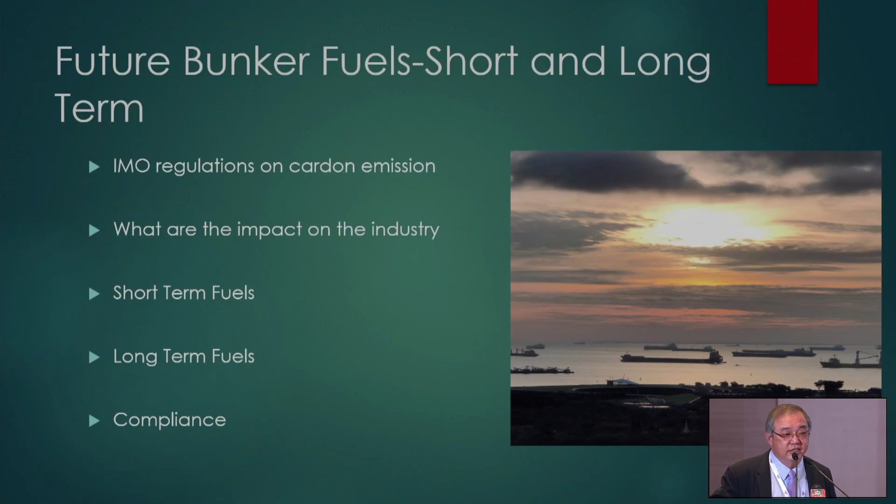Now, reduction of sulfur - on January 2020, IMO regulated all vessels cannot burn more than 0.5% sulfur. So that's when the decarbonization started. And then at that time, it was also announced that by 2030, IMO target carbon emission to be reduced by at least 50% based on 2008 emission, and by 2050, zero carbon. So that is what happened.

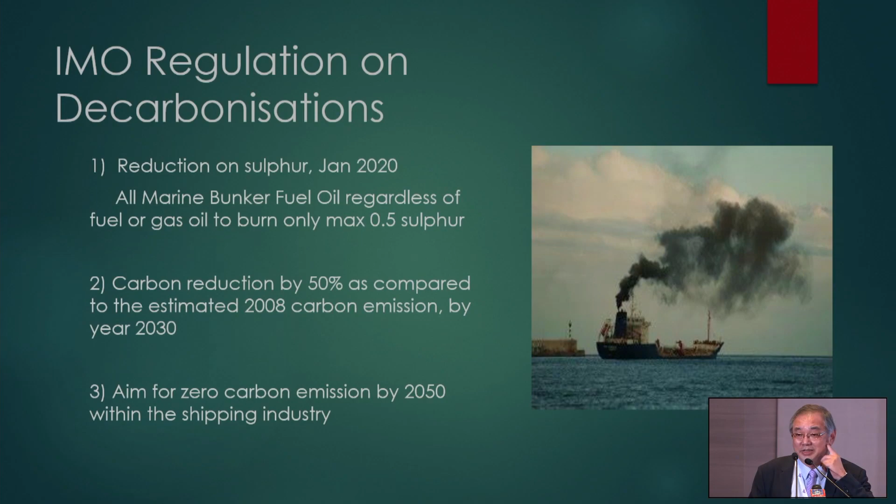So when we say zero carbon, my first thought is, what will happen to fossil fuel? Because as of today, fossil fuel cannot meet zero carbon. So what will happen? Food for thought.

When we started off the 0.5% sulfur, we had an initial part - there's a lot of quality issues. I remember the case of Houston, whereby engines broke down because of blending, because of some sort of chemicals involved. Why? Because the majority of crude oil at that time, till today, doesn't produce 0.5 or low sulfur. Probably only sweet crude, right?

Only sweet crude has low sulfur. So a lot of the low sulfur marine fuel is blended down to 0.5. So what's our blending component? Nobody knew. So we had a big quality issue that year, that started off from Houston and it spread all the way to Singapore.

But of course, it was very fast, it was blown over, things settled down and then things just went back to normal. Okay, until beginning of this year, Singapore had one big issue whereby Glencore blended fuel for low sulfur hit more than 200 vessels - not that 200 vessels complained of engine problems, but contaminated product was supplied to more than 200 vessels.

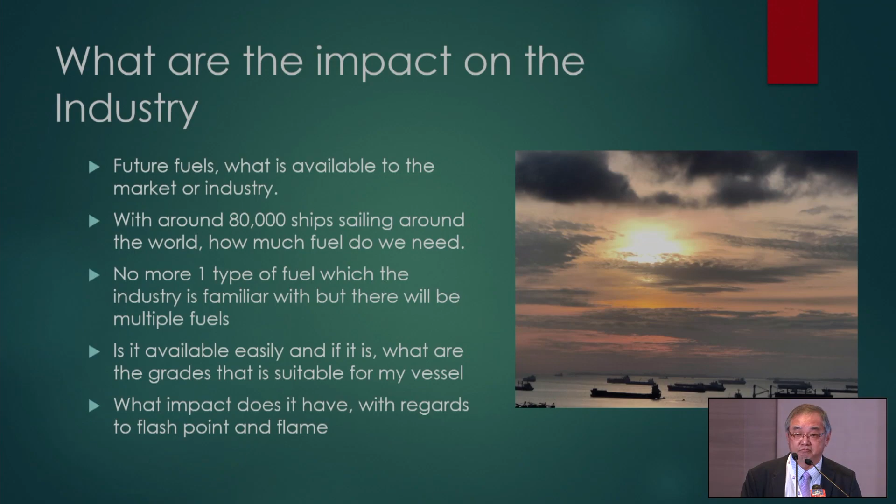So like I say, availability of all this alternative fuel or greenhouse-gas-friendly fuel is a big headache today. For the next 5 years, it's still going to be a big mess, a big headache also, because not every port will have it.

Just this year in March, I was moderating a panel in Singapore at a conference, and I was telling the audience: all major bunker hubs will go into multi-fuel supply. That means besides low sulfur fuel and low sulfur gas, they will also come in with biofuel, methanol—we call it multi-fuel.

But there again, bunker suppliers ask me, Simon, multi-fuel, how much should I allocate my bunker tanker? I've got 10 vessels. How much should I allocate? One vessel for methanol, one for biofuel, 2 vessels for very low sulfur fuel? And guess what? I tell you today, nobody has the answer to that.

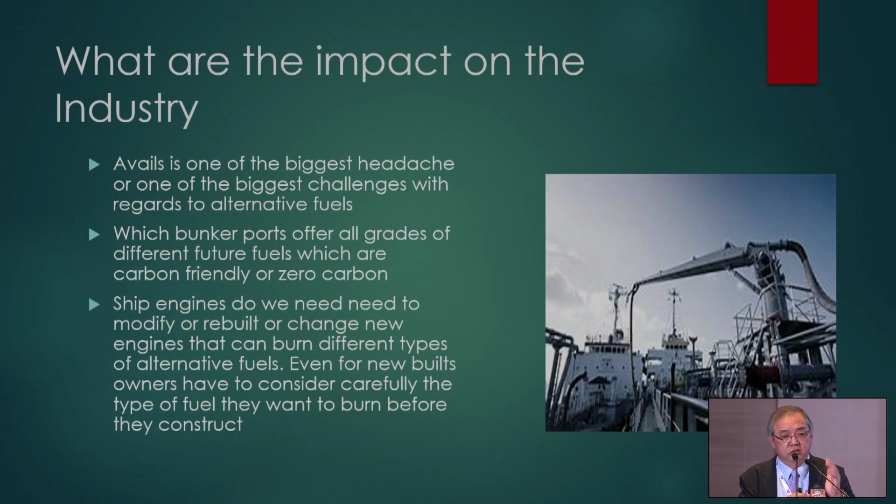These are considerations that ship owners have to consider. That's why for big fleet ship owners, it's easier, because they have a lot of vessels and are able to allocate how many to methanol, how many to each different type of alternative fuel that will be available.

When a ship has multi-fuel, what sort of things are they going to look at? Can my engineers or my crew handle this multi-fuel or not? If I'm burning LNG, does my crew know how to handle LNG? Product knowledge again - if I'm burning gas oil with methanol, does my crew know how to handle methanol? Because methanol can pose some health risks and safety concerns, right? So do they know how to do it? Some of them is just like, oh, methanol, I take it and drink it as alcohol, and the next moment they just drop dead. That's what happened in Russia, Siberia.

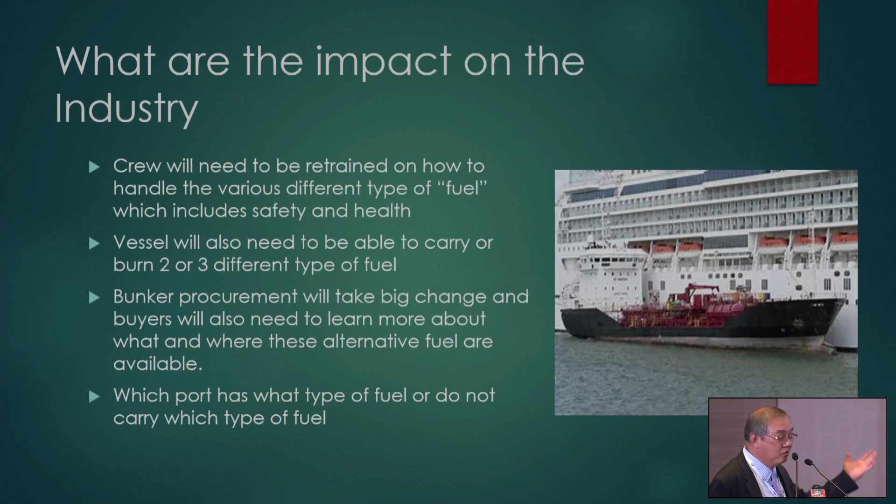So, suppliers going to new fuel, how much will it cost me? LNG today hit through the roof, 4 figures per ton. How about biofuel? Biofuel is also today close to $1,000, when fuel oil is only about $600 to $700 per ton. And how about ammonia, green hydrogen, and all that? Nobody knows the price. Again, crew on board a bunker tanker, on board a ship, do they know how to handle this type of fuel or not? Because of health and safety concerns. Cost of operation definitely will have to shoot up.

So these are impacts that we will have to face when we go towards zero carbon, zero emission. Cost of shipping will go up because bunker fuel - today, operation cost of a ship, some of them tell me it's about 30%, some tell me it's 50%. So when you have 30%, 50% of a cost that is on the fuel oil to move the ship, if all these costs start to go up, our product becomes more expensive. Don't forget, besides that, when I burn methanol, for 1 ton of gas oil, I will probably need to burn 1.5 to 2 tons of methanol. For 1 ton of gas oil, I may have to burn 2 tons of LNG to have the same propulsion. So cost is definitely a big issue, going to be a big issue.

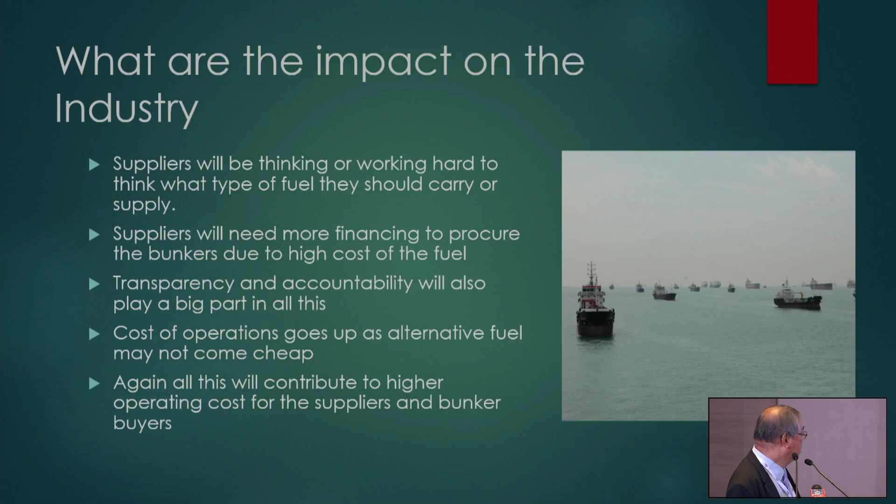Short-term fuels - today we are talking about, are we talking about 2030 short-term or 2050 short-term? 2050 is definitely a long-term fuel, because it's going to be zero emission. 2030, some says, oh, that's mid-term, not short-term. But to me, that's short-term, because 2030 is to prepare you for 2050.

Based on IMO regulation, long-term goals will be to best not use fossil fuel. That means IMO is telling us, hey, 2050, let's cut all the fossil fuels. When we say all that, is the terminal ready for it? Ship owners ready for it? Bunker suppliers ready for it? Yes, you say 2050 is still a long way, but infrastructures need to be built early and not wait until 2040 to start building all this infrastructure. I tell you, it's going to be too late.

So short-term fuel may not meet zero carbon, whilst long-term fuel are those that can meet zero emission. Short-term, we talk about biofuel, LNG, methanol, etc. Does this mean fossil fuel will cease during the short term? No. My personal prediction is fossil fuel will still last up to 2040, that's when all the new ships come in, ready to burn zero emission product. So that's why by 2050, fossil fuel for bunkering, I think, is gone.

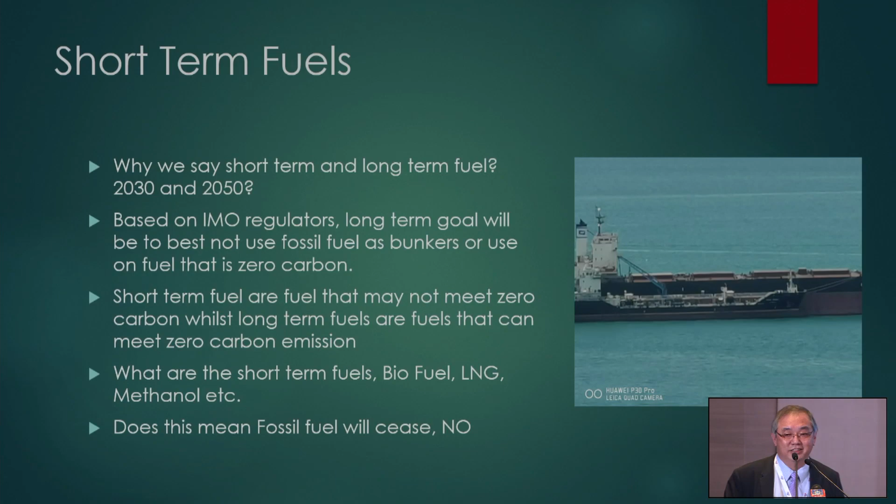Presently, biofuel is catching on - Rotterdam, Singapore, Indonesia, Malaysia. I'm not too sure about Fujairah, but it is catching on. Malaysia, they are burning B10 for gas oil. Indonesia, their own internal fleet sailing within their islands is burning up to B50, B70. Singapore, we allow up to B25. So the volume is catching up, is growing.

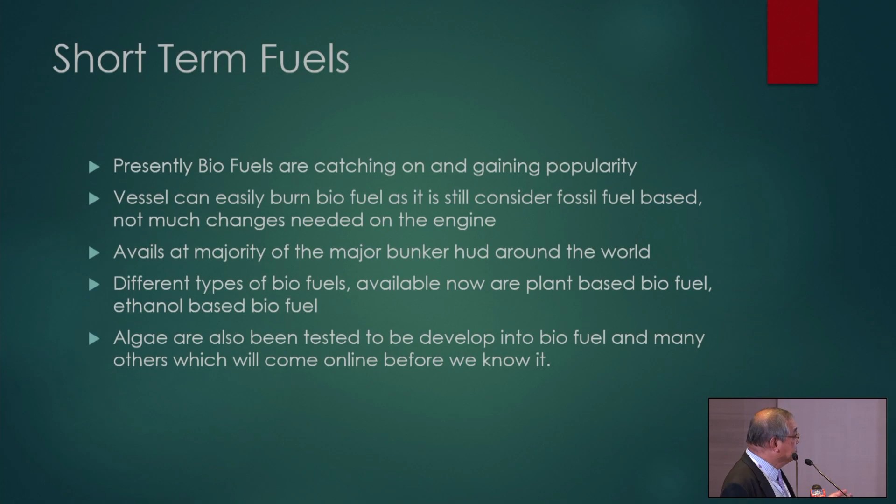So for biofuel, for ship owners, to buy biofuel is much, much easier, to procure biofuel is so much easier. Algae are also being tested to develop into biofuel, and frankly there's many others that have been tested. Ethanol is one of them, sugar, plant-based biofuel, right?

LNG, why do we say it's short-term? Because LNG actually derives from fossil fuel also. Concern is the methane slip, because methane is a gas, invisible gas that burns the ozone area - it burns a big hole in the ozone area on the Earth. So for LNG, we are very concerned about methane slip. But of course, there is the other LNG, which is green LNG - that can be a long-term solution.

Right? Very low sulfur fuel oil is considered short-term. Like I said, even up to 2030, fossil fuel will still be around, but the usage will probably be lesser.

Methanol, conventional methanol, can be considered short-term, and it can also be looked at as long-term. Why? Methanol is petrochemical based.

One good thing about methanol is when there's a spillage, unlike fossil fuel where I've got to fence up the whole ship and the area around the sea, for methanol, when you have a spillage that goes into the sea, it disappears. It doesn't kill, it doesn't harm the environment, the ocean environment, the sea environment. So it is very clean, right?

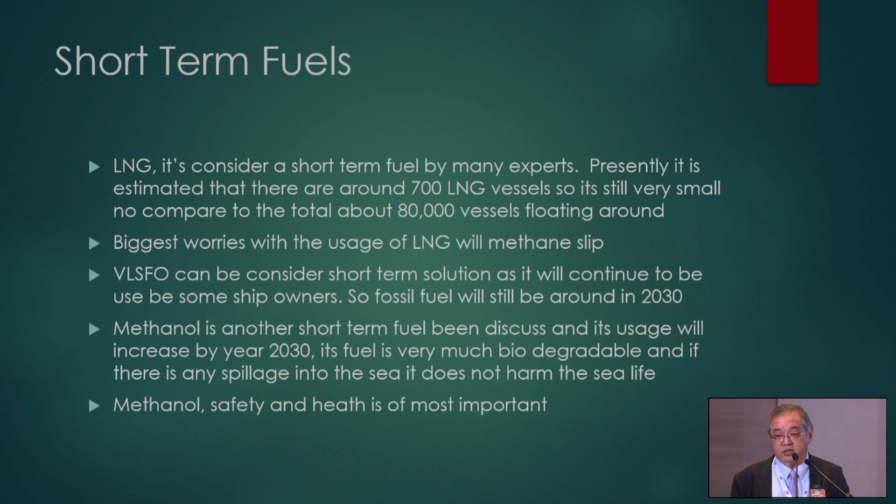So for long-term fuel, we have to discount fossil fuel by 2050, because of zero carbon. There are two types of hydrogen people look at: green hydrogen, considered a zero carbon fuel, and blue hydrogen, which produces low carbon at a scale that's hard to calculate, hard to abate, because it's very, very low. Of course, some considerations we need to look at are handling, safety, storage, and ultimately the price of hydrogen per ton basis.

Ammonia is another good source, which today some ship owners are trying to go into, right? And there are already some bunker tankers being built in Korea to handle ammonia.

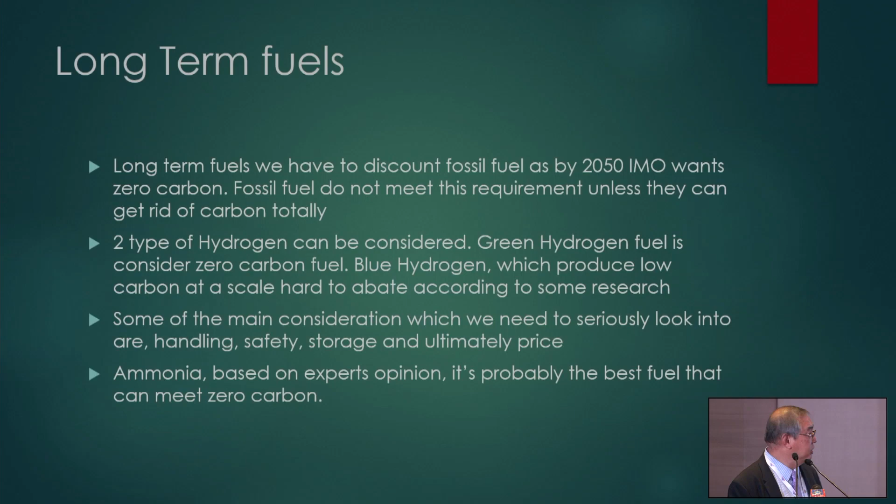As for ammonia, and in fact not only ammonia, even hydrogen, we need to relook at the infrastructure of the bunkering. Safety design of the bunker tankers is also key, very, very important in methanol, ammonia, hydrogen.

Then, of course, next is when all this becomes so expensive, we look to the government - hey, can you help us with a handout? So local government support, or even collaboration and regulation, will be key to the use of all this as bunkers. It's not just the handout, I'm just joking, because it's a regulating part. Government must have the resolve to regulate all this.

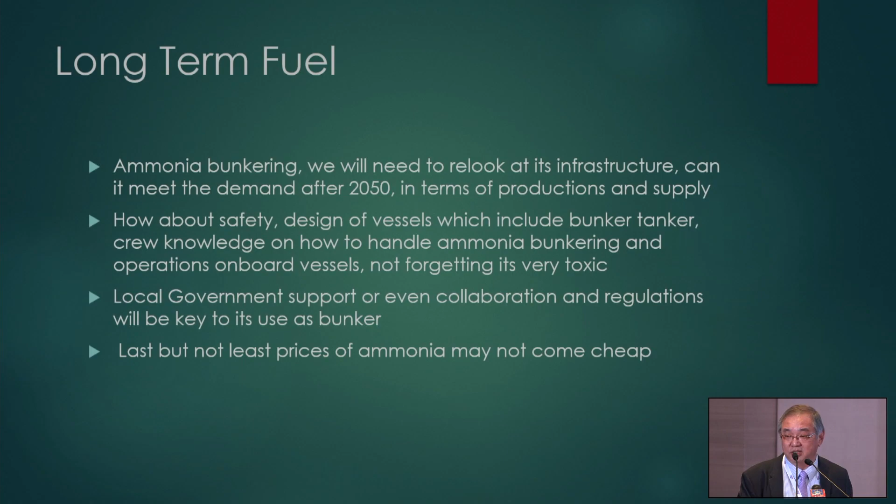Last but not least, prices of ammonia, and not only ammonia, hydrogen, may not come cheap. Today, for example, methanol is about 300 odd per ton. That means if I burn 2 tons of methanol, it only costs me 600 plus, so I'm still within range, still cheap, still okay. But when the demand from ships for all these products comes in, where's the supply? Because there's more demand really.

Green methanol is a good source for long-term fuel, and they also produce less SOx and NOx, helping meet environmental fuel regulations and improve air quality. Disadvantage: like I said, if I burn 1 ton of gas oil, I need to burn probably 2 tons of methanol. So the rest is the same.

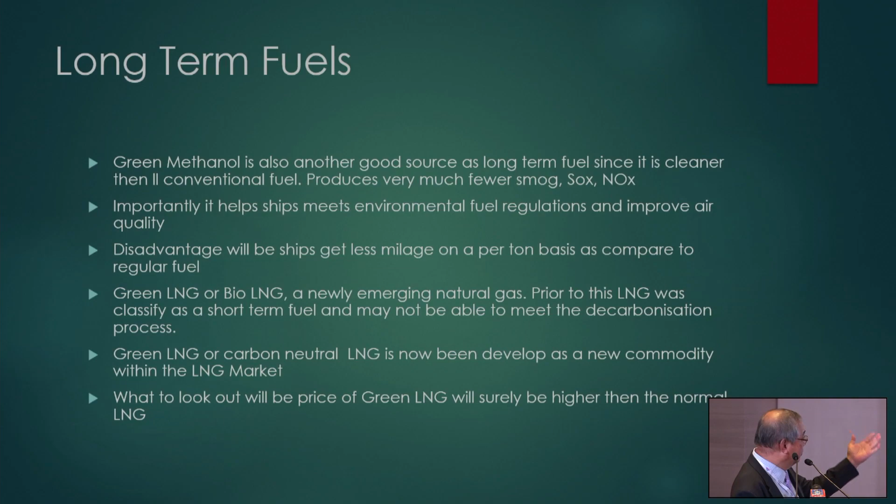Now, compliance. As we move to future fuels, we need to look at compliance, because compliance is something that is very, very important.

We are also looking at, when it comes to digitalization, EBDNs. That means when I deliver bunker to the ship, once the chief engineer signs the BDN, the invoice goes out - not to the office, not to the cargo officers on board the ship or the bunker tanker, but straight to the bunker buyer, ship owner, and the office. So less paperwork, less human interaction.

And of course, when we talk about digitalization in bunkering, mass flow meter plays a major part. Because during the pandemic, if Singapore did not have a mass flow meter, we would not be able to conduct contactless bunkering - that means no crew come to the bunker tanker, no crew from the bunker tanker go to the receiving vessel, everything through mass flow meter only. Because people build trust through the standards.

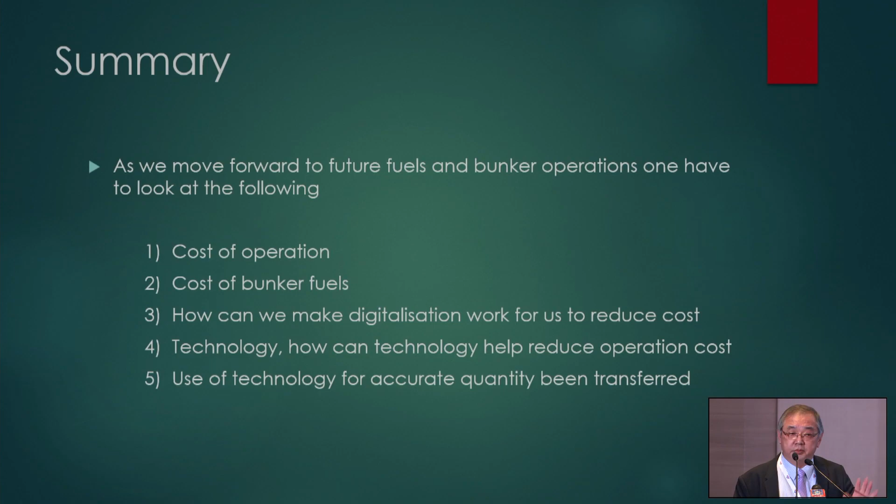So these are some of the things that when we move forward to future fuels, we really need to look at. I've mentioned many times, cost of operation - how are we going to reduce cost of operation? Through digitalization, technology, use of technology like MFM, for better quantity control, both from the terminal and also on the bunker tankers.